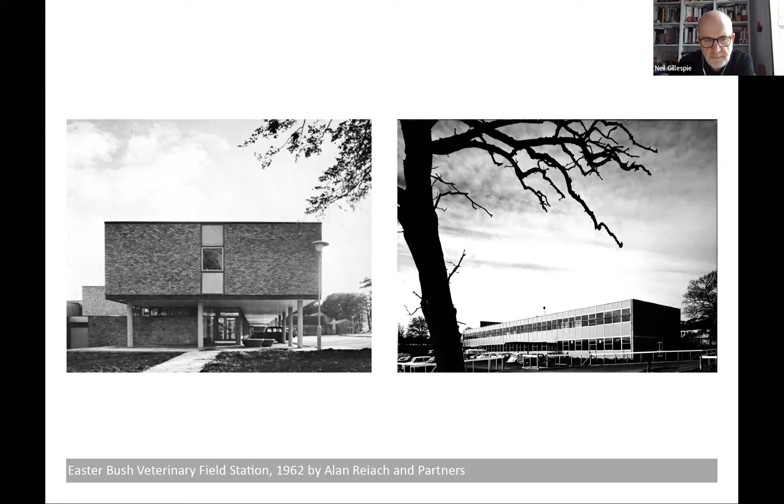And I think that modernism, if we go to the next slide, Mark, continues to the present day. We see it as a continuity. We think there's still tremendous mileage in that particular kind of modernism, albeit along the way we've added more elements or more layers to that.

Our Maggie's, for example, introduced perforation, the introduction of the light catcher, we called it, in the courtyard. You'll see references to that within Forth Valley. So we're talking about an architecture that is based on our own heritage and our own history, and that connection back to a 1960s modernism, particularly Scandinavian. Next one, Mark.

And we're also fascinated and inspired by the Scottish landscape, and particularly Forth Valley College and the River Forth, and that floodplain, and the three campuses that we were involved in, beginning with Alloa, then Stirling, and finally with Falkirk, the largest of the three.

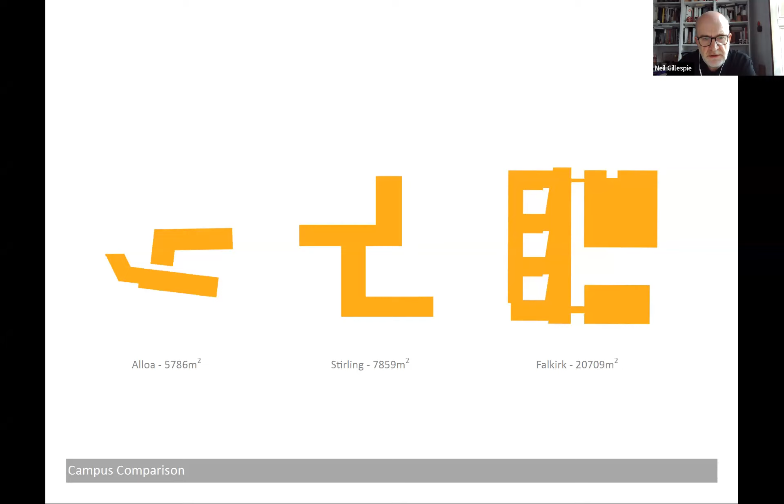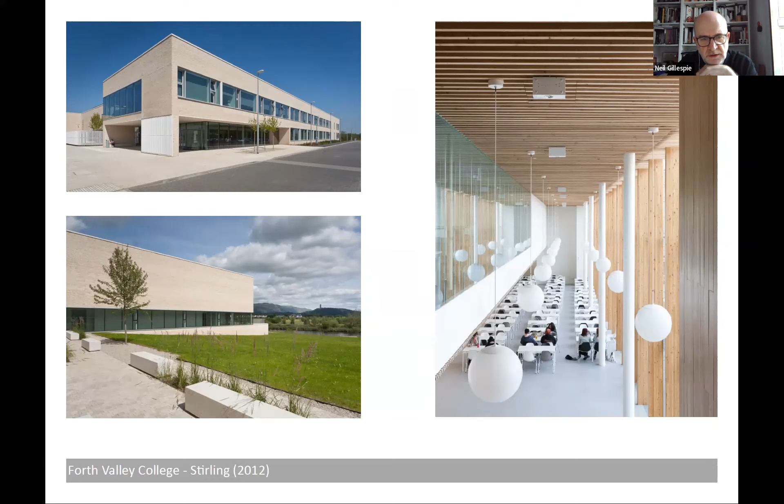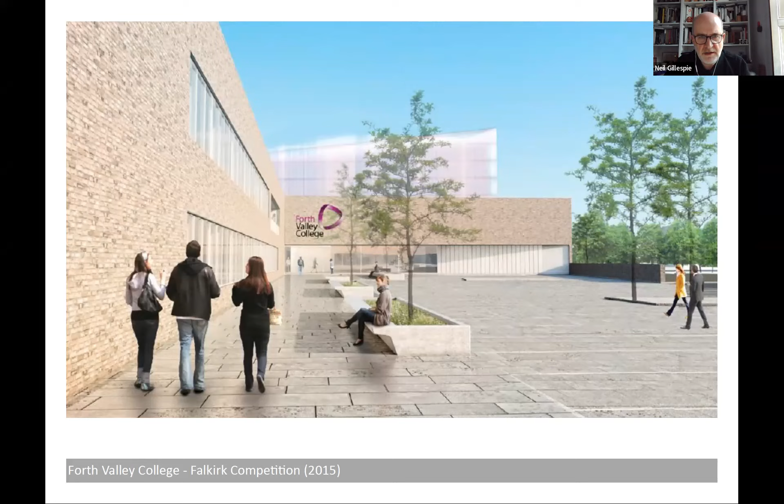Next slide, and we'll go through the diagrams quickly. There was a competition for this one, and the first scheme was a more ambitious scheme than the one we built. In actual fact it had a theatre in it, Falkirk Theatre, but probably correctly it was thought that project should remain within the centre of the town rather than out on the edge. But it did have a more exuberant, gestural aspect in that first iteration.

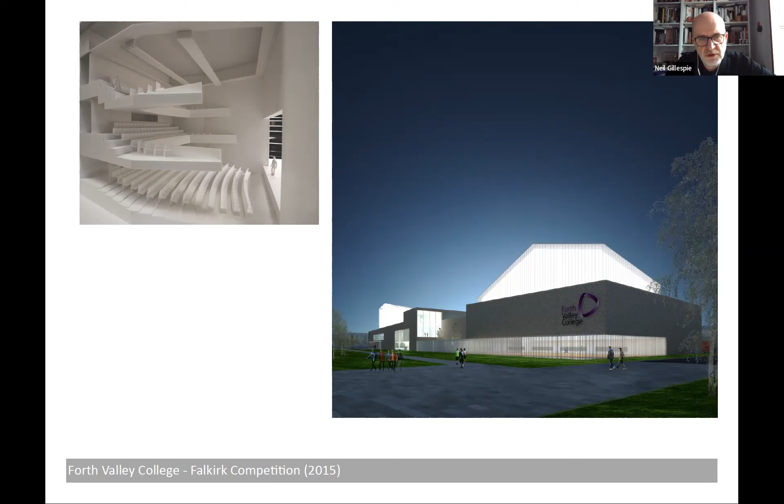From that there's a sense of a flat, open view through to the Kelpies and back to the town centre itself, this diagrammatic sense. The football stadium is immediately to the east of the site.

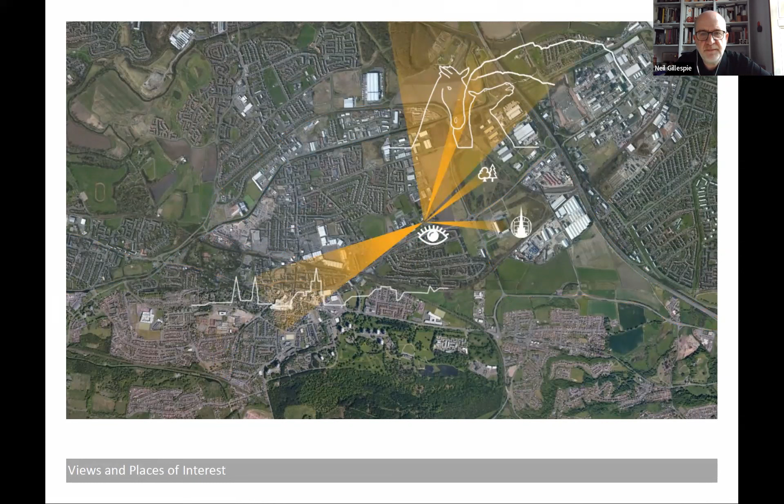And an industrial area, a lot of industrial, giving you a sense of scale. We're about 10 to 15 minutes from the centre of Falkirk to the south and west.

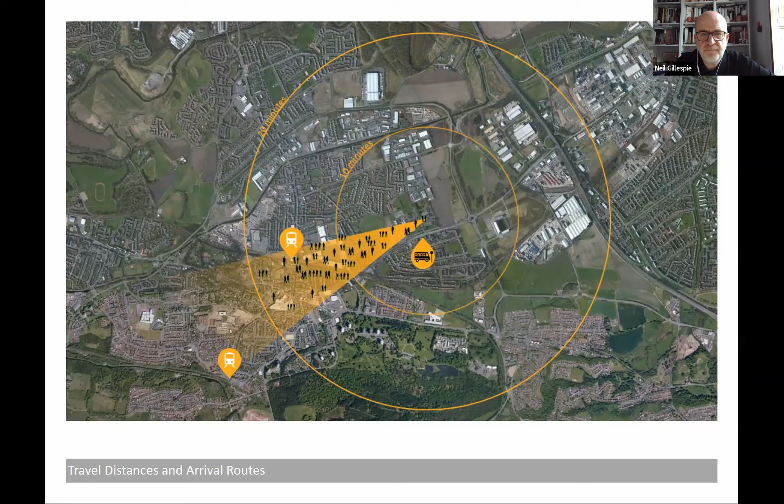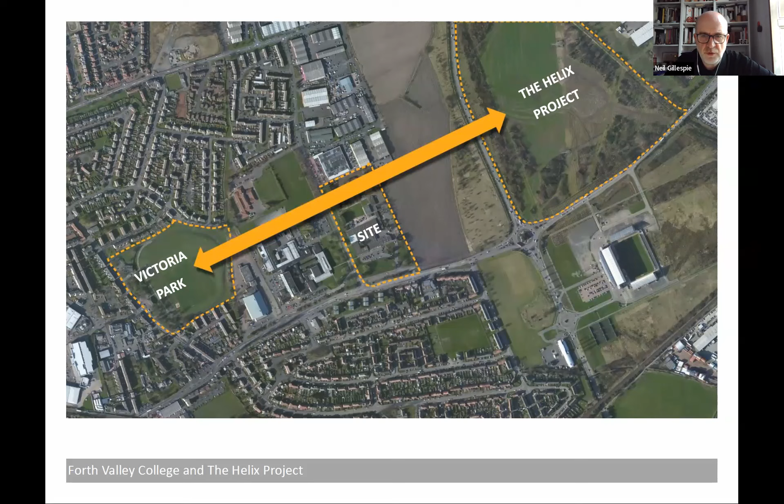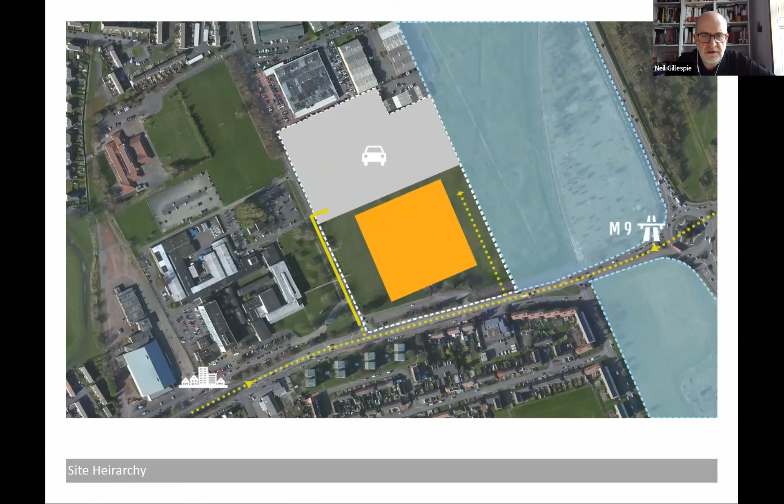You can see the football stadium, and the site is split very simply, bringing the yellow part, which is the site, forward to address the M9, with parking to the north.

We split it very simply: number 2 is the staff and student parking, which begins a route through the building from the north. Visitors parking is number 1 and enters from the south.

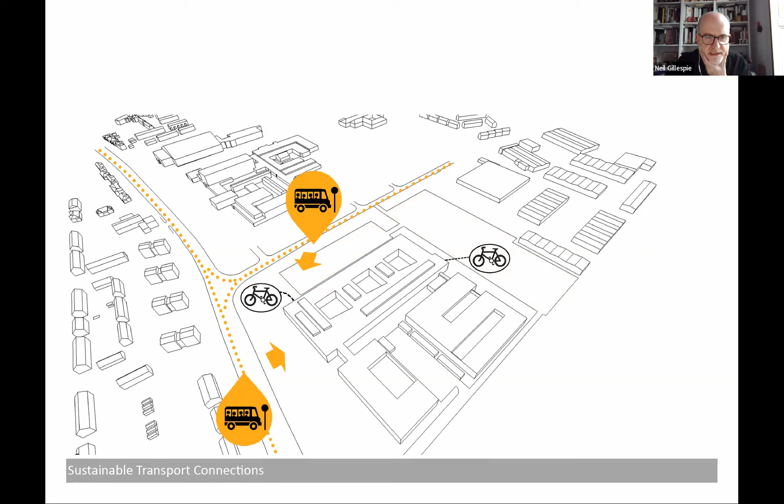Along with where the visitors parking is, bicycle parking and public transport are brought onto the site.

The building itself - Mark will explain this in more detail - has three basic components. The grey is a workshop building. The brownie colour is the sports and community spaces. The multicolour building is what we used to call a linear matrix, a series of...

...legs around courtyards. You'll see this in our Stobhill Hospital and our Inverness Justice Centre - the sense of bringing daylight and amenity to the centre of the building through a series of courtyards.

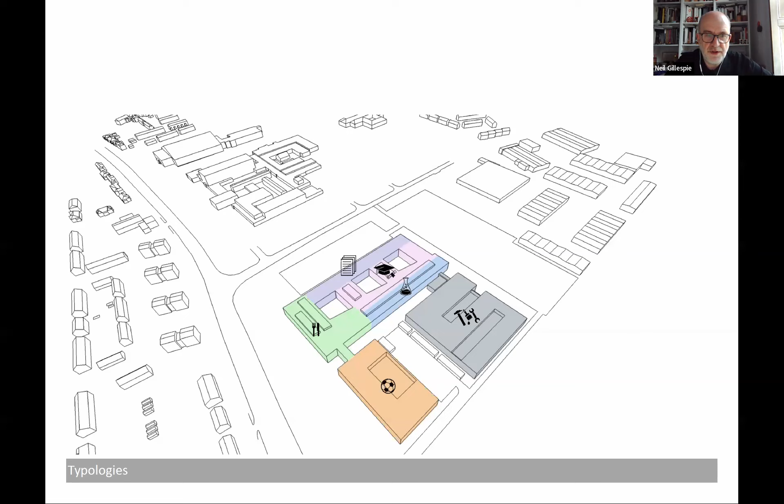The green represents the dining areas and flexible spaces. What this means is that the building, as it addresses the town, also allows the community to access the building out of hours.

That coloured area involves all the shared and flexible spaces which relate to the town, while the college specialist spaces run to the north towards the staff and student entrance.

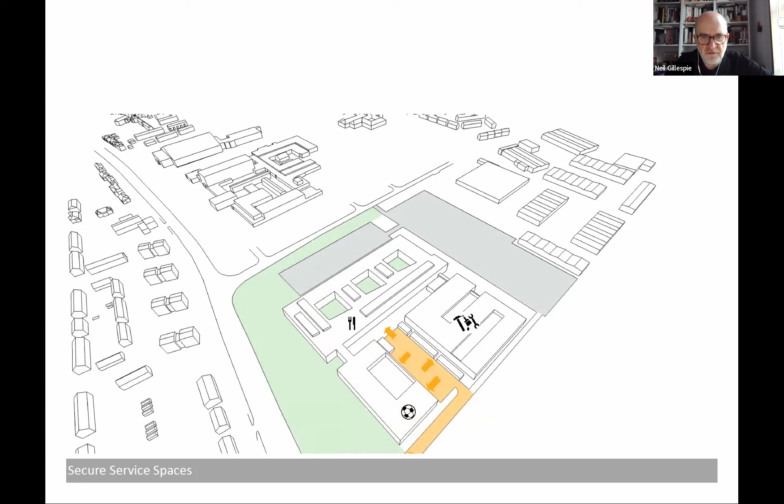The service yard sits between the three of them, giving access to all three. It's a separate, secure access from the M9.

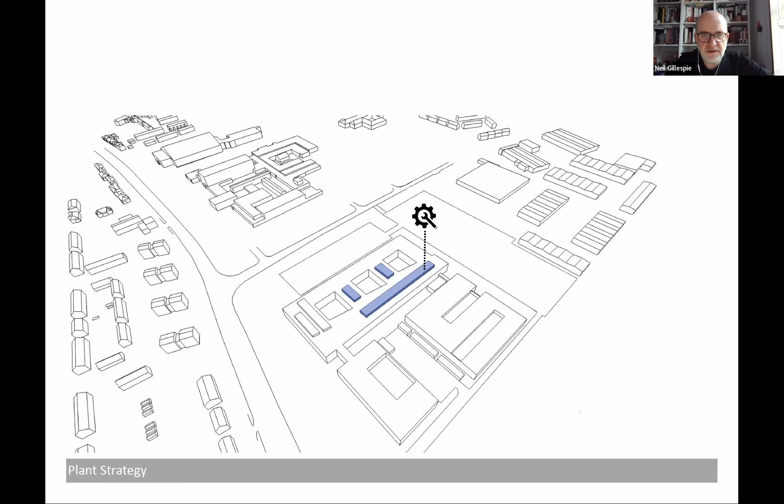Plant strategy on the roof, which Mark will touch on later. This Victoria Park connection, through Helix to Victoria Park via the college, was a really critical move through the site.

Together with a really subtle colour palette that the landscape brings. The landscape colour calls out the Forth Valley logo, but it's the silvery colour which works incredibly well with that Danish brick and the birch trees, as they grow up. We start to get a real sense of that Scandinavian idyll that Alan Reiach was interested in, and we still are.

Thanks, Neil. I'll have to go at a bit of a clip just to get through the next slides.

That's effectively just picking up on where Neil left off. The building finds its way to the southeast of the site and is pulled back from the public access routes to the south and west, creating dignified civic space in front of the building.

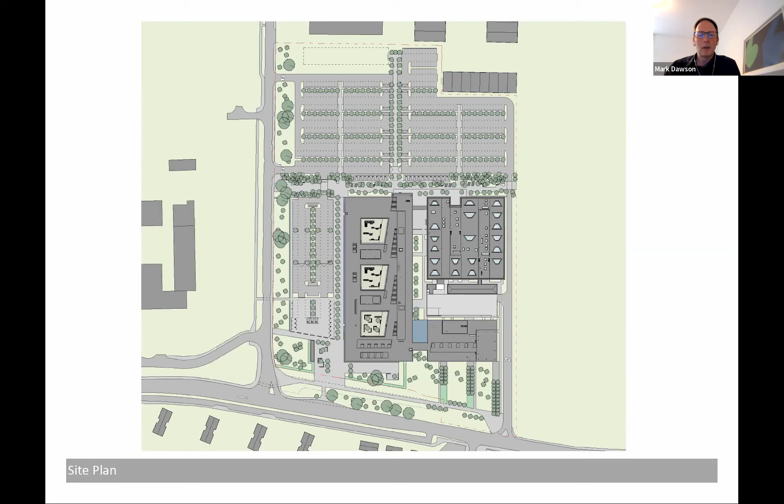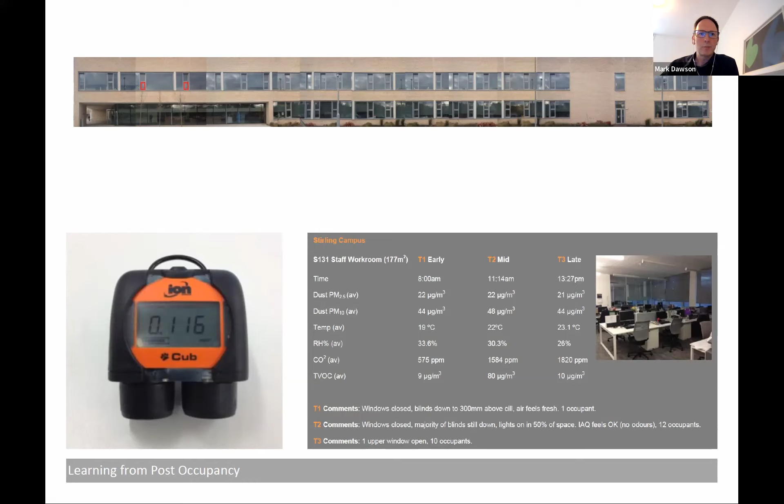We started the design of the Falkirk campus by looking back at the design of the Alloa and Stirling campuses and at the post-occupancy evaluation assessments done for both of those projects. One interesting finding was that some of the highly occupied south-facing areas tended to overheat and have poor indoor air quality at times. So that was one of the things we tried to address with the design of the new campus.

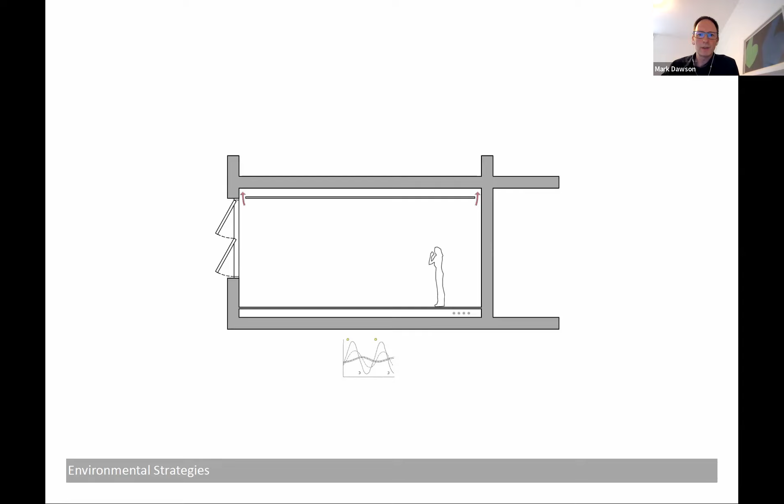In Alloa and Stirling, we had a suspended ceiling wall to wall, but in Falkirk we tried to get access to the potential cooling capacity of the precast concrete floor slab to help iron out the peaks and troughs we experienced in Alloa and Stirling.

Another thing we introduced was mechanical ventilation as a mixed mode system, so we could still maintain opening windows but have the boost of the mechanical system in the background on days when it was a bit still outside, helping draw air through the building and keep comfort conditions. In winter, you can close up and rely on the mechanical ventilation system with the benefit of heat recovery and the energy benefits that brings.

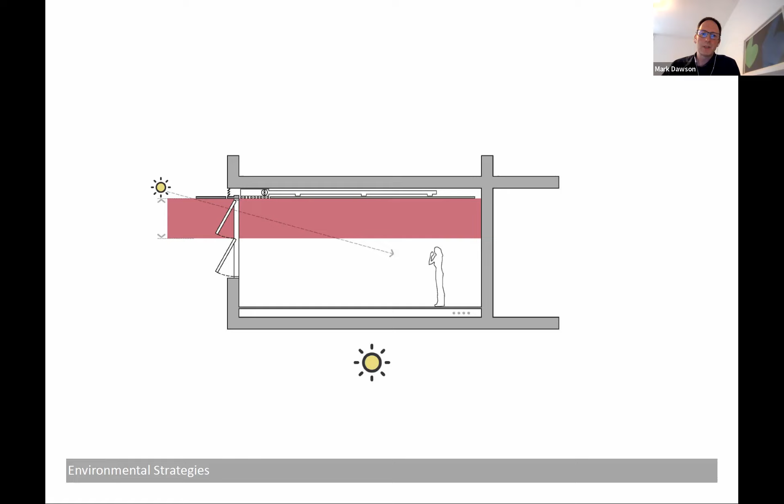In terms of daylight, we've got a generous floor-to-floor height of 4 meters, allowing ceilings about 3.2 meters high, which gives a really nice feeling within the space. Because we've placed the glazing right up at ceiling level, it allows deep daylight penetration into the back of the classroom spaces, which has let us have a 7.5 meter deep classroom space, which also works in terms of single-sided ventilation where spaces need to be naturally ventilated.

For the lower section of the glazing, we were keen to maintain connections from inside to outside, so we placed the horizontal transom at 2 meters so it wouldn't interrupt that connection between the building and its environment. At the lower level, we introduced an 800 mil high sill, because you don't get any benefit from glazing down to floor level in terms of daylight factors within the room.

This also allows increased flexibility for the college—they can fit out the internal classroom spaces with benching at the walls if they need to.

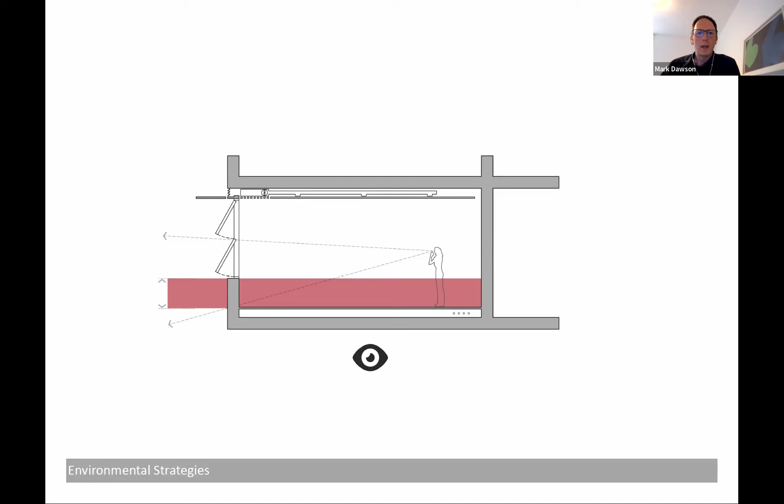A different approach on the south elevation, where we've got floor-to-ceiling glazing on the public-facing facades, helping create a connection to the public. We've got a 3.5 meter deep cantilevered precast concrete solar shading device, which lets us achieve full glazing without the downsides of unwanted solar gain.

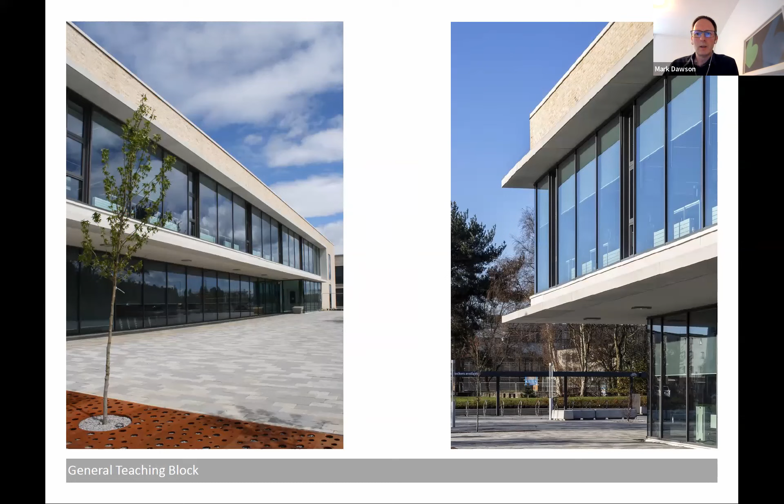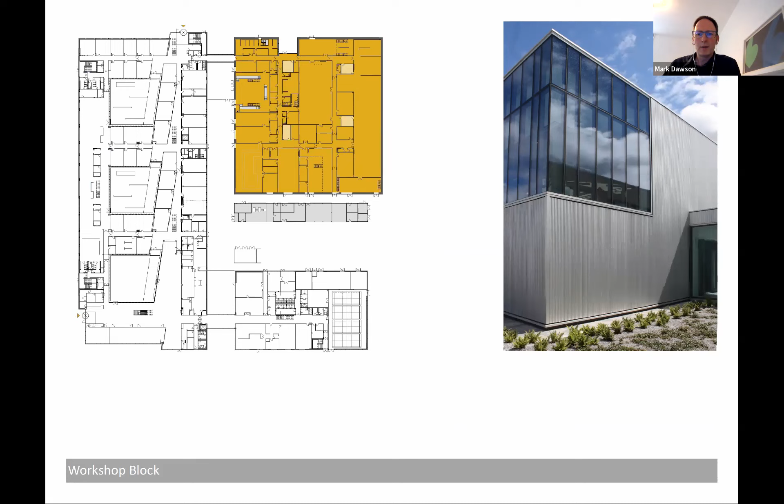The workshop block, in contrast to the materiality of the teaching block, uses an extruded anodized aluminium cladding system as a rain screen. On the north elevation, we've created that same 3.2 meter datum but flipped it, so windows only happen above that datum, allowing the college to fit out the workshop spaces flexibly, with light brought in from a series of roof lights and clerestory glazing.

What we really like is the contrast between the rougher textured teaching block and the smoother, shinier workshop block, and the texture that brings. It almost looks like staining, but that's just a visual effect of the aluminium cladding system, creating streaks that change depending on light conditions and viewing angle—we really like that almost drawing-like, watercolor type effect.

Inside the workshop blocks, we used roof lights again, applying lessons learned from Alloa and Stirling, where we used the structural bracing zone within the roof lights as triangulated bracing zones.

So the space between those bracing, we utilized that for dropping these really massive trapezoidal roof lights down and flooding those spaces with daylight.

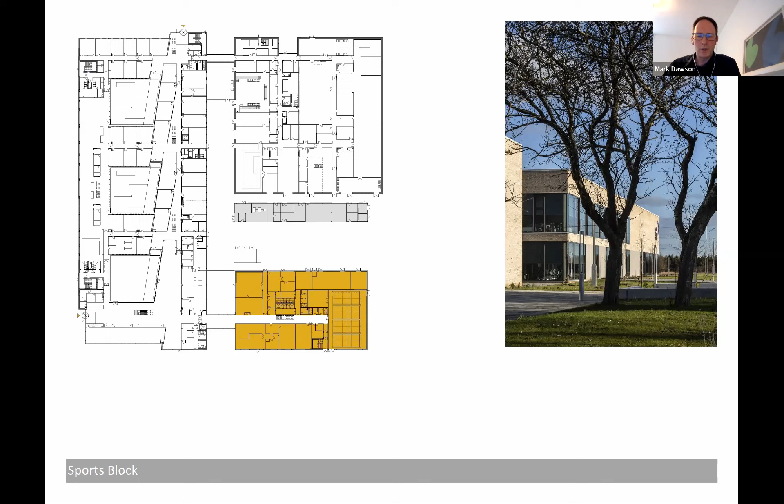Then the sports block to the southeast of the site occupies a really important, prominent part of the site. It's got the sports facilities, things like hair and beauty, but also social sciences as part of it. Obviously these are all community use facilities arranged along that south face, with some sporting spaces and teaching spaces associated with sport on the upper level connecting down into the spaces where sporting activities take place, having a nice connection between those two things.

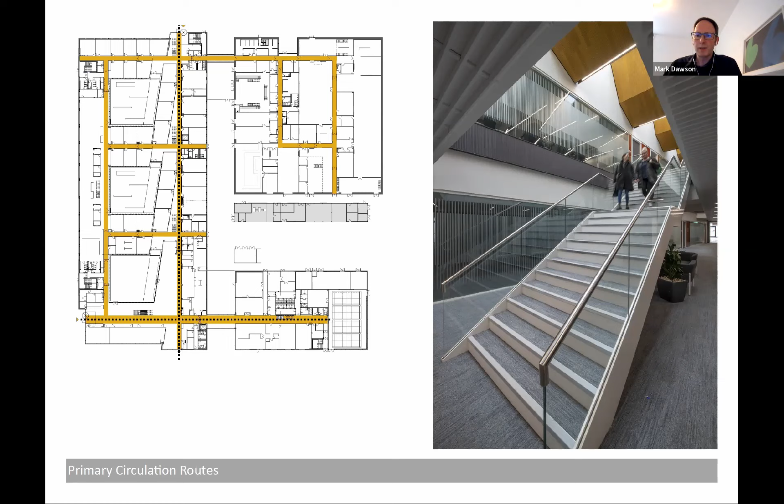For the circulation routes, we've played a game with the schedule of accommodation in terms of borrowing space from the staff areas, taking that circulation route out of the staff space, and planning it more efficiently. Then we transferred the area we saved into areas where the students could actually make use of the space, like the circulation space on the right that gives different learning opportunities, all punctuated with the roof light top-lit spaces.

The nodes of these circulation routes identify our orientation devices, really, where we've got things like stairs and toilets always placed in the same place to aid navigation and make the plan quite legible.

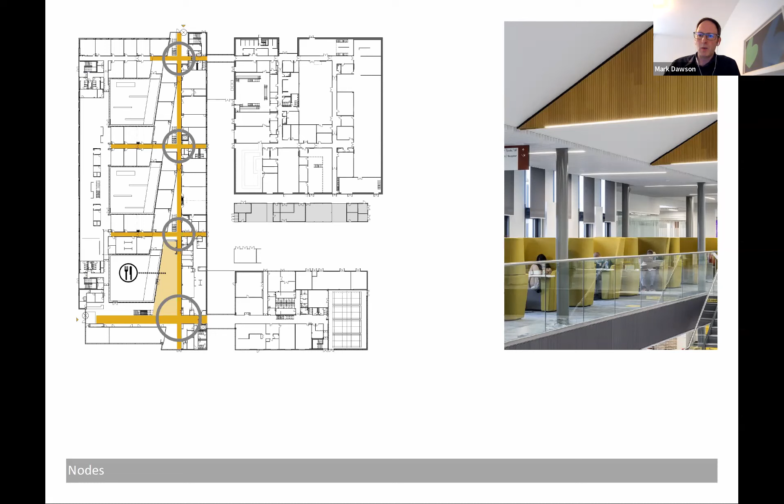Things like the refectory find themselves at the heart of those spaces. On the right-hand side there, one of the breakout flexible learning spaces that opens off that particular space gives you a small scale, individual learning opportunity. Then other spaces like the Learning Resource Centre on the right open up and give you the potential for group activity.

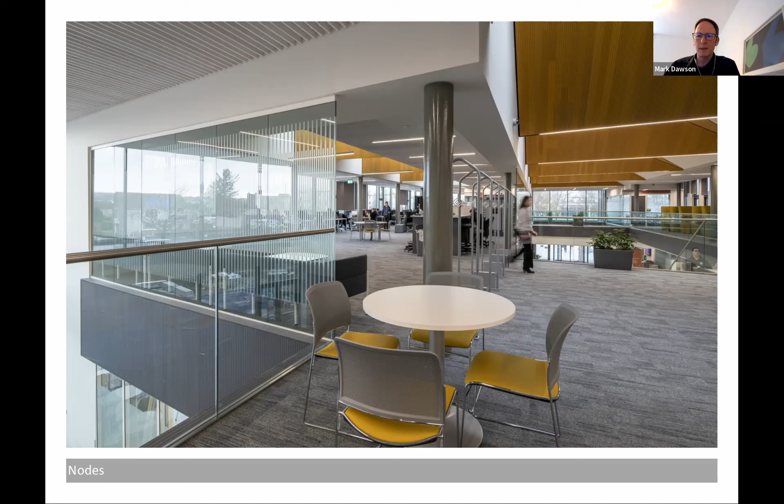The staff admin spaces are arranged over 2 levels and have a hole cut in the center to increase communication between the staff. The central space between that runs from north to south is arranged for the general teaching spaces - these are bookable spaces that aren't assigned to any particular department.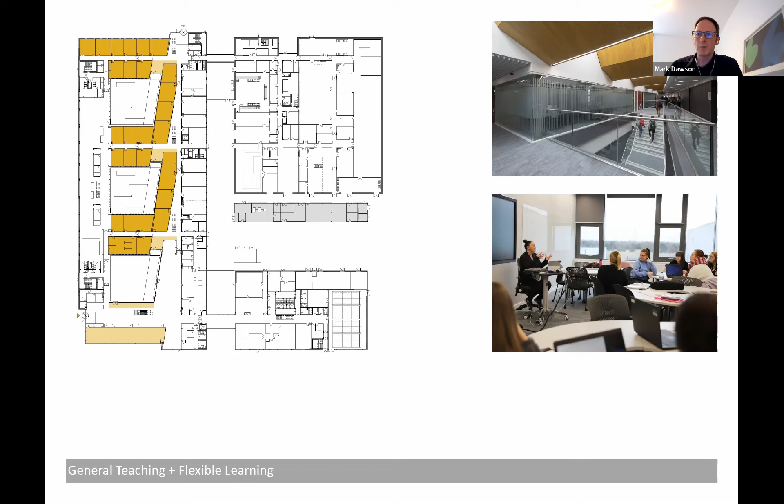Again, that twist of 9 degrees allowed us to open up the circulation and carve those holes into the floor plate, allowing generous amounts of top light down into the plan.

This is on the right hand side - this is artist Stephen Alders, who we've worked with on quite a few projects like the National Archive in Wick and Maggie's Centre. We really liked the fact that this painting is referencing a Rietveld interior.

We just really liked the colour contrasts on that, and that's reflected in the back-painted Valchromat, the back-painted glass, and the Valchromat linings to the roof lights that we've brought through into the college.

And then just making use of the circulation spaces - even these sort of little eddy spaces that just branch off the circulation, getting beneficial use through that.

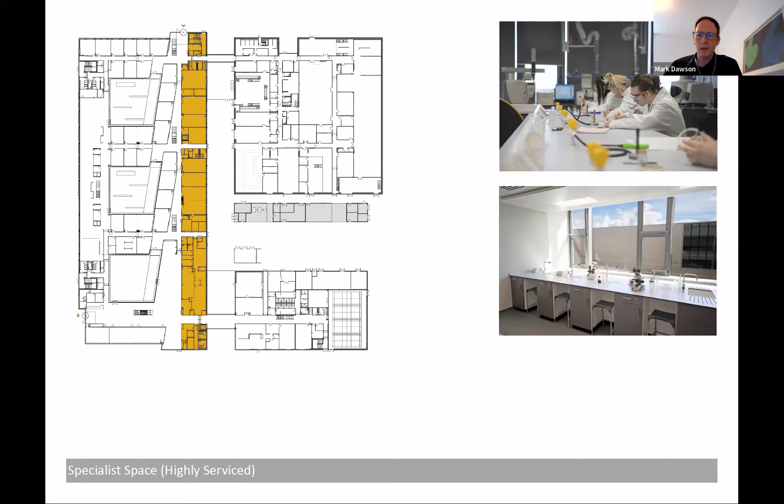The specialist, highly serviced spaces like the labs and the science spaces are in this north-south spine, which is arranged directly beneath the main service plant spaces at roof level, just to shorten duct runs and make everything as efficient as possible.

Bringing that through into the roof lights, we've really enjoyed playing with this roof light design. We've got it associated effectively with all the circulation routes and all the key spaces as a sort of motif that runs through the building.

And again, that line idea - the drawn lines and the Valchromat on the left - being reflected through into the lined perforation, or the pattern we've cast into the precast concrete on the outside, hopefully tying the inside and the outside together conceptually.

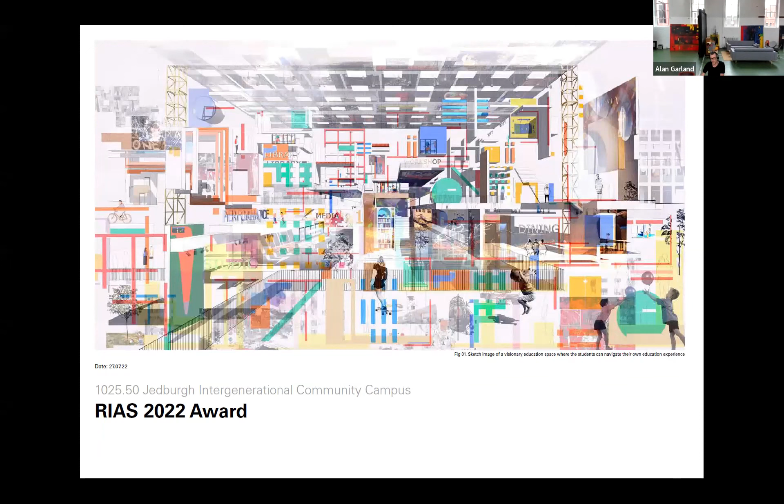One of the key ideas is nestling it into the landscape. It's the Scottish borders, a wonderful landscape of rolling hills, and we tried to make this large building part of that landscape, to ingrain it into the natural setting.

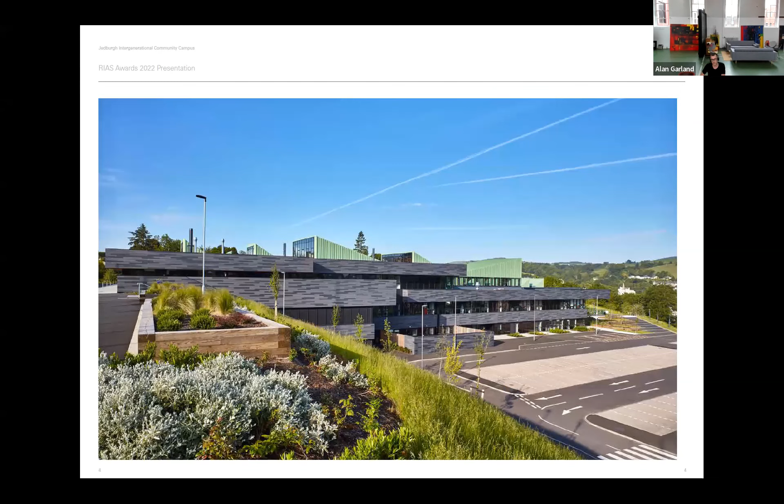That's the external main key shots that have been promoted. Internally, this is a key space, the information plaza. When you walk in, it's a space that the Scottish Borders Council or authority doesn't really have elsewhere. It's a communal, large volume space - not really a dining room like many schools have, but a more community focused space, which I'll pick up a little later.

That's looking in the other direction, where it has the classic stair upstairs like many schools, bringing you up into the space. It's a very community focused school, slightly different from many of the other community campuses that have been done. So we really tried to innovate within that space.

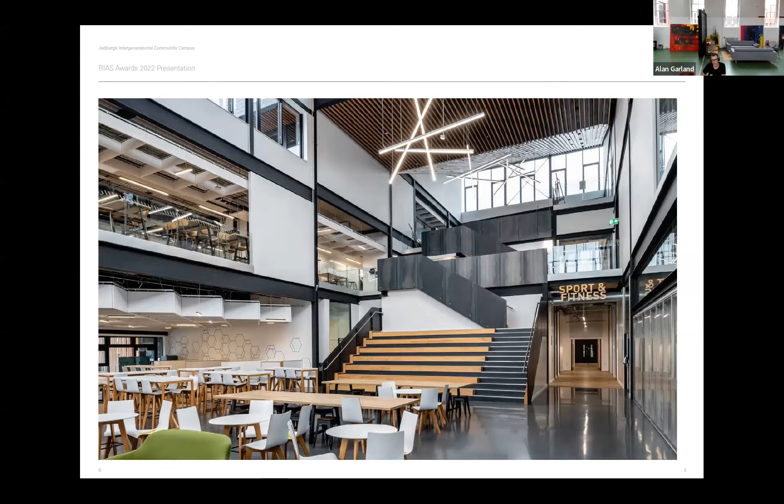This just looks into it - you can see on the right-hand side the main information plaza, and on the left some of the teaching spaces break out onto this open plan. There's this idea of the community accessing these facilities within the space, all being connected and visual throughout it.

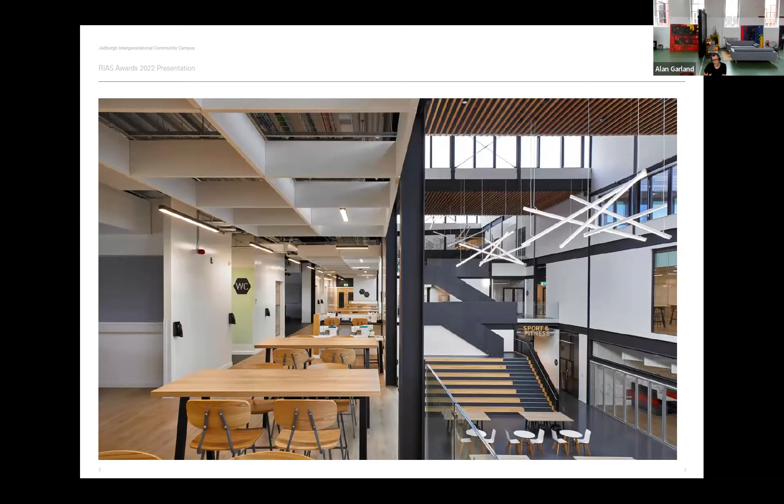This looks at some of the teaching spaces where we tried to make this an actual classroom, but break the mold from the traditional classroom. So this is somewhere for individual study, small group study, discussion, debate points, or even a space for each year group that's theirs to combine.

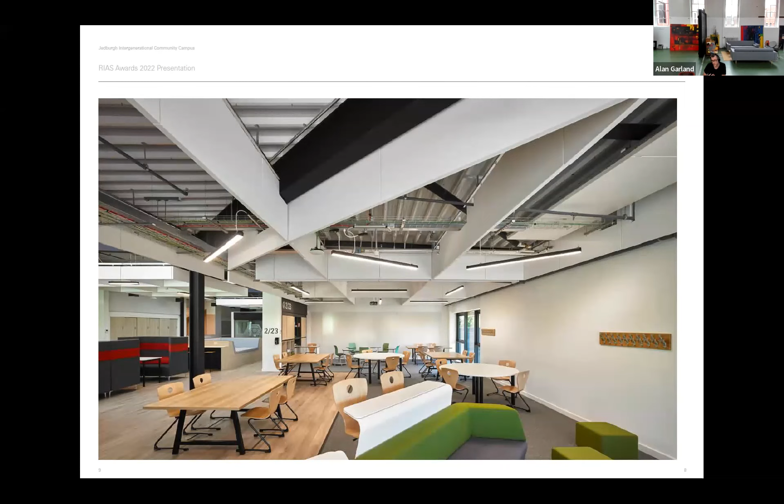One of the ethos as we go through this is about trying to change or review particularly the senior phase of education. This is again a paired classroom space, open onto the breakout, so we really tried to break down the model of enclosed spaces that we've seen in many schools.

This would be the science lab, which looks at a cluster arrangement rather than individual labs - it takes 3 labs and converts them into a super lab arrangement with demonstration benches and different types of furniture, trying to make it a standing workshop type environment rather than sit and chat. The STEM lab again brings in different technology and a combination of different education modes.

For us, this project allowed us to look at 3 key aspects of the architecture practice that I think the practice are very interested in: place - what makes a building, how do we ingrain the place - and community.

Part of the work with this client, the Scottish Borders Council, is about flipping the dynamic of their estate. One of the sayings was, this isn't a school that the community gets access to - this is a community building that the school uses. So the idea is that this is a community focused space, and that's part of that intergenerational campus.

That leads onto the next one, the learner journey. The school, or this space, this building, was supposed to be for lifelong learning - 2 to 102 was the sort of description. This is what it's tended to be used for.

In the centre place, Scottish Borders, Jedburgh is located down just north of the Southern Uplands. It's a rich landscape of rolling hills and historic, almost ancient towns nestled in there, with some real grand structures that cross through the valleys, and a beautiful rolling landscape. The history of Jedburgh was founded around the 9th century.

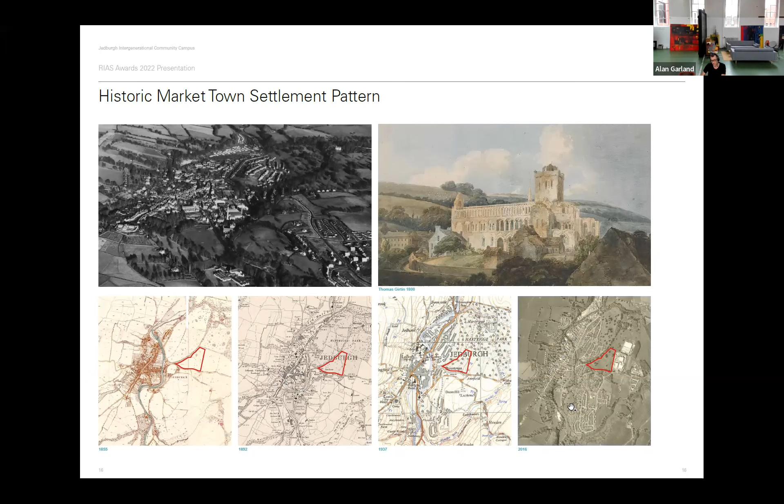We look back to what was there to understand where it's going to go. That's the site here, and you can see through the older maps how it's a market town. As it expands across the water, it moves more into the new developments over the last 50, 60 years of post-war housing expansion.

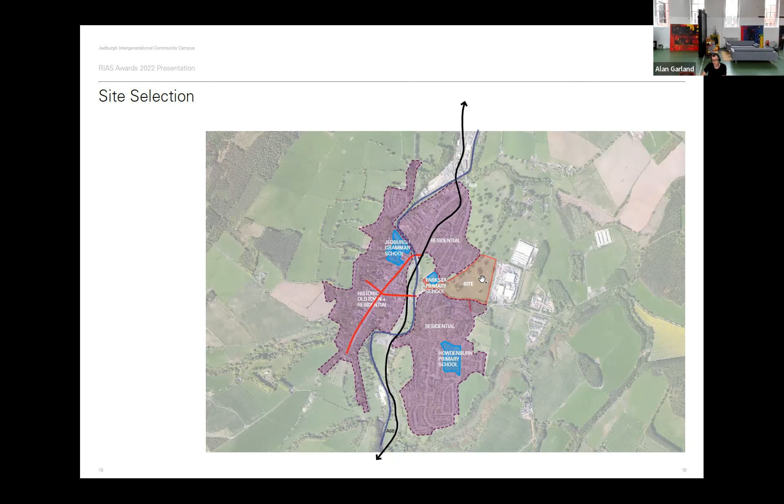So they decided to build on what is a very challenging infrastructure site. You can see here, it's a greenfield site, not developed within any of the records. It's the right size, but that 40 metre change from right down here to the top of the hill where the factories are was a significant challenge with no road access.

A dirt old path along there, a historical driveway with 150-year-old trees that go along it - we had to navigate through that for a road. But as you can see, it's a beautiful landscape setting. The views you get along there and over the hills were stunning. It was one of those dream sites you get given.

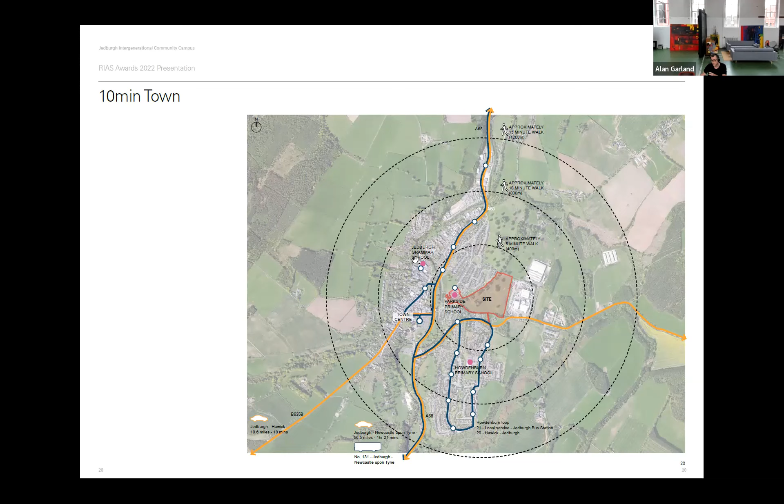You can see within the town, it's a 10-minute town. Everything's within that walking distance. It's all very compact, and the population is roughly about 3,500 people. The two primary schools, one over here and one down here, and the high school there, is all very compact in that town. So that was part of the ethos, to keep that delivery within the central space.

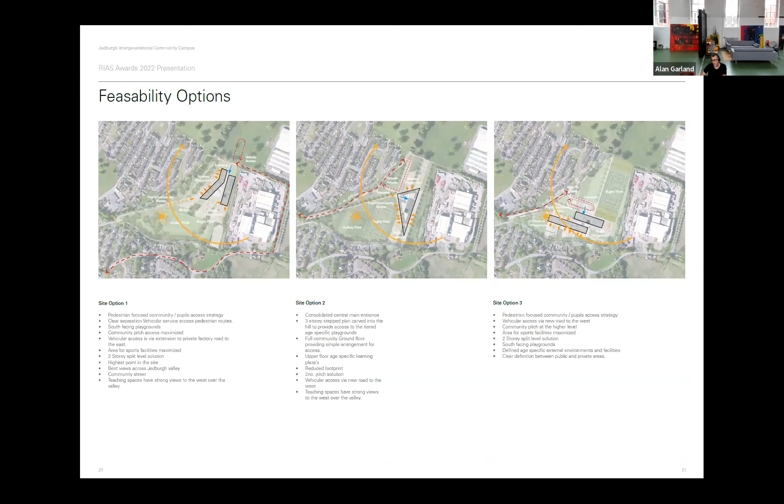And we tested some really early feasibility options, because obviously the infrastructure and how that's going to work within there was something we had to test through various options.

So the learning environment. When the client came to us with the idea, let's do an intergenerational 3 to 18 campus, we're like, what's the brief? Their first point was, let's put the scheduled accommodations, the ACRs, all the requirements we've done for the previous PFI and previous SFT funded schools, let's put that to the side. Let's start from scratch and think about what we're trying to deliver here in terms of education.

And they wrote a paper, the bidding paper. I'm not going to read through all the lines, but essentially they wrote this as the brief of what you want to deliver, and said go and come back to us with what you want to do. There's a space where the talents, abilities and skills of everyone in the community are brought together for the benefit of all. A space where education is for everyone at every stage of their life. The Scottish Borders works to enhance the quality of life, make best use of public resources, and ensure continuous improvement of services. The council aims to strengthen Jedburgh as a learning town where children and people of all ages can grow and learn together, where education is embedded within the character and quality of the place.

So that's essentially all they gave us, to say go and look at what this can be. We started to work up diagrams and ideas of what it can be, and it fell into sort of three circles, three spheres.

You had education, which was a vehicle for delivery of this. You have the community aspect - they wanted the facility to be open like a community centre or sports centre, so you could walk in at any point in the day, and the spaces for the school could be used by the community. Then they looked at enterprise - how could we facilitate the growth of smaller businesses, bring training opportunities for young people, and facilitate enterprise. If someone's working in a small business from home, they can come here and use this as small enterprise space. So trying to really flip what this asset can do for a community and make it key to it.

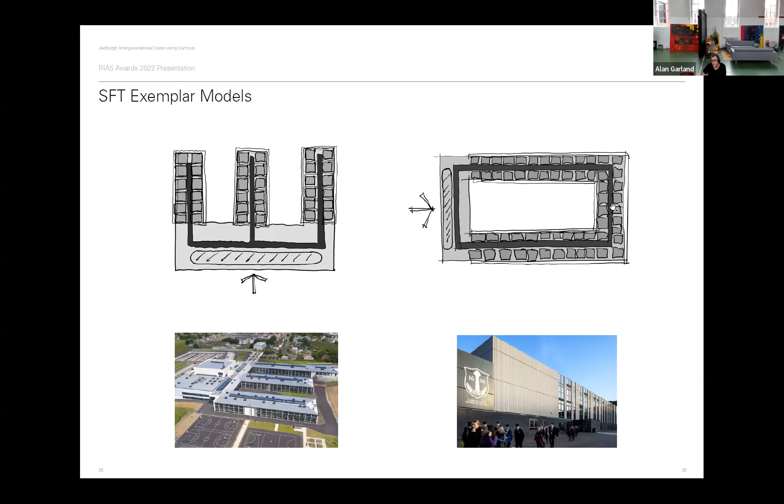The SFT promotes certain examples of the classic finger plan, which has kind of a PFI feel to it, and then you've got the super block arrangement.

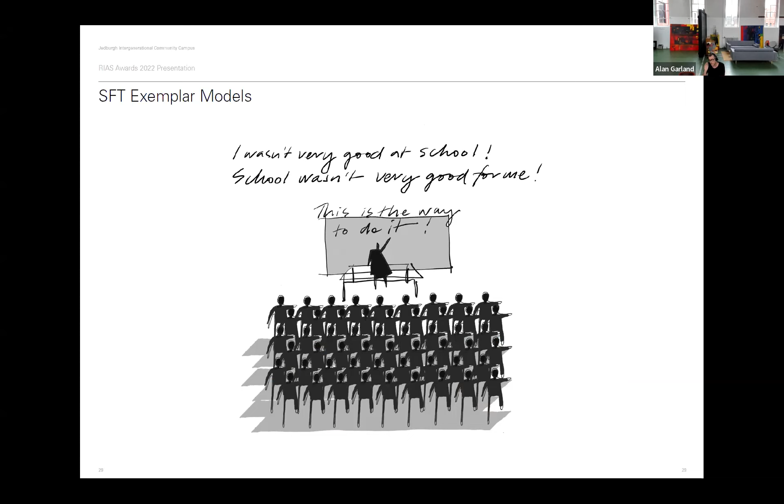From our analysis, and also discussion with the client, when you look at the early years and the primary, they've moved on in terms of the curriculum, but by the senior phase, there's still a propensity to do classroom after classroom, chalk and talk, 30 kids facing a board. That cellularizes the space and creates a warehouse of just putting kids in this space for a period of time, creating departmental boxes.

So we didn't want to do that. We wanted a space which engages with pupils, which brings life, and where people want to be.

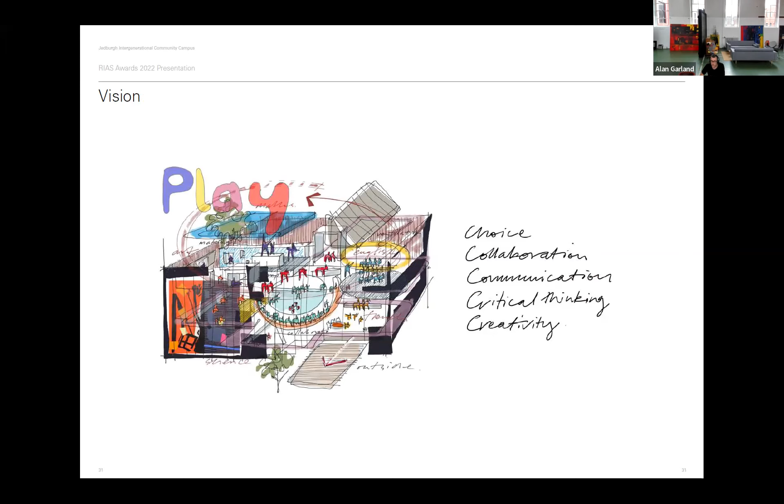It's part of that community space where it encourages pupils to engage in their own learning. Then we think about what do you need to learn? School and education, that's the vehicle, the key component of it. It's a broad spectrum, not just what results you get at the end. To make the holistic, rounded pupil, the super pupil, you need to bring that whole aspect to it.

We're trying, and it's not as much anymore about chalk and talk, it's about trying to create critical thinkers, looking at different pedagogies and how you can educate more than just that one mono pedagogy, which is primarily associated with 30 tables and chairs, focusing at the board, the sort of cells and bells.

From most people's journey through school, there is this sort of pre-primary, you know, you may have done something, and then it's all the primaries all the way up, and then it's secondary all the way up, and it's each box, you jump in each of the silos.

But the Curriculum for Excellence, we actually read it and went through it and started that idea of this is where you build a brief from. You look through the Curriculum for Excellence, and they've built this learner journey through the stages, where you group the stages together to minimise the transitions.

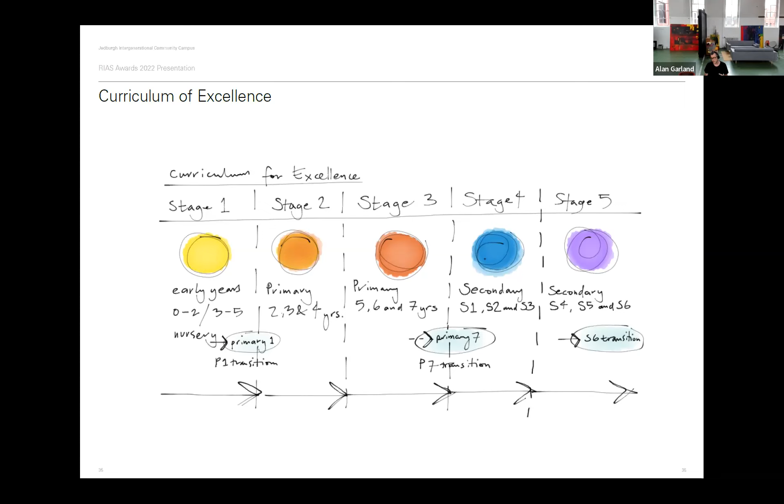As a 3 to 18 campus within a closed community almost, a sort of static population, that seemed like a very clear way of starting to build up this idealised curriculum of excellence layout, where you take the learner journeys. If you go through the process, understanding that a nursery pupil or early years pupil is completely different from where they learn in senior phase, you think of how you create the houses of the different stages through the journey, and then bring the things that can be shared across it, creating the sort of shared social space in between.

Then looking at that as part of that learning landscape, creating the whole landscape that ties it all together as part of that inside-outside arrangement.

Organisation in terms of, you find this very siloed approach, particularly to the senior phase, is an interesting aspect we like to challenge. Usually you've got your departments - art, math, all your different subjects - but the cross collaboration between them doesn't happen because they're so siloed. So there was an idea that instead of having it as departments, you take what you can out of that and create it more as a non-departmental model.

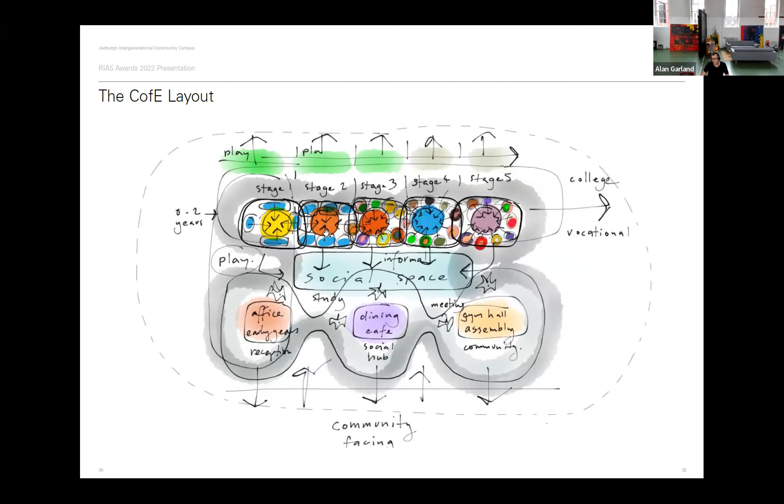So it's an age model, more akin to each of the learner stages. You've got maths taught within the stage cluster rather than in a specific department.

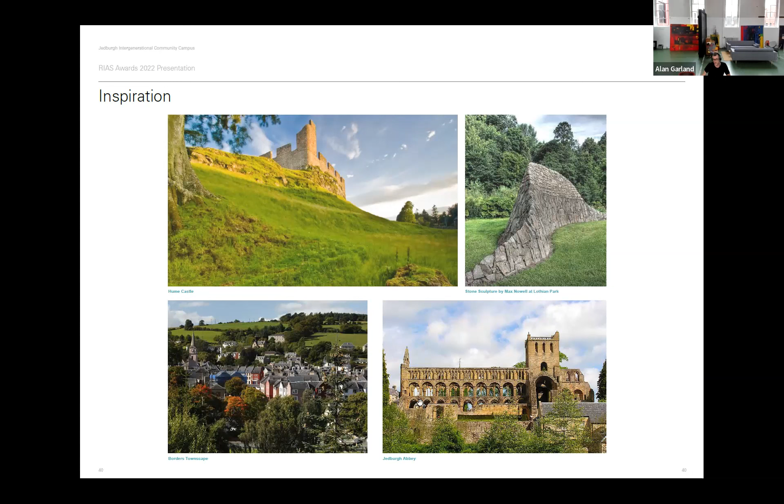Then when we flip back to the townscape, the Scottish Borders has this rich tapestry of space, of ruins - Hume Castle, which is stunning, sits on the hilltop. Then you have various different aspects, particularly in Jedburgh, you have the ruinous abbey that sits there, and you have these towns nestled within it. We're really trying to pick up those themes within the design.

When you look at the 20-metre change in level up the hill, how do we blend in that journey with that area, that space? The idea of layers and platforms and tectonics started to influence how we thought about the design of the school.

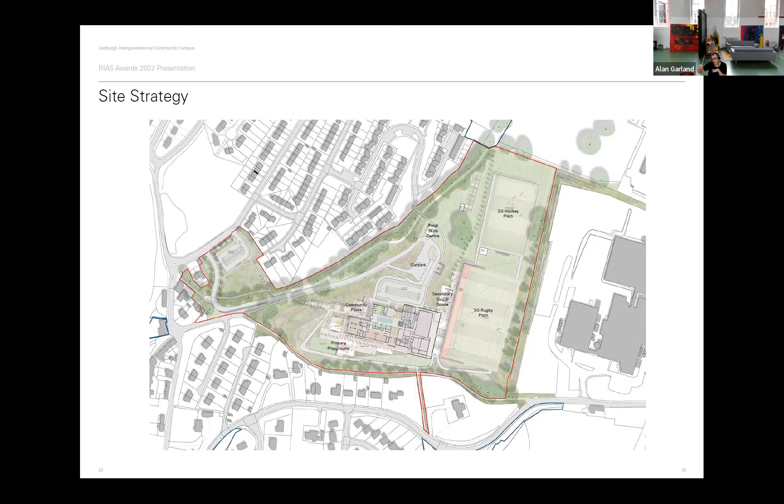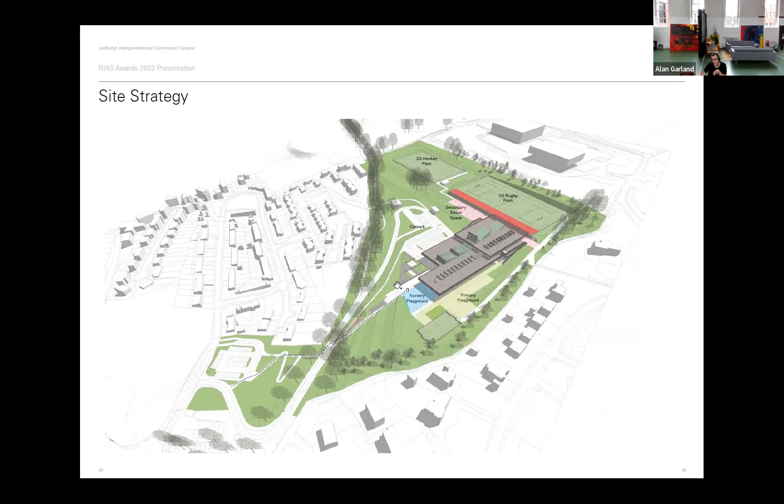So essentially cutting platforms into the hillside to fit this within it. This gives you a three-dimensional aspect of it. So we have that journey up from the main body of the town through there, and then you have the various different playgrounds again, and then the learning plaza within that space, and the big section cutting right through. The idea being that the landscape transitioned as we went through it.

Coming through the sort of historic driveway and that more wilder, larger bushed landscape spaces as you journey up, and then it gets more refined and more manicured to a certain degree around where we're at the school.

And then you have one large retaining wall with the building sat in there, so you nestle it in the hillside with the pitches dropped in the top of it. So the idea of knitting it into that site section.

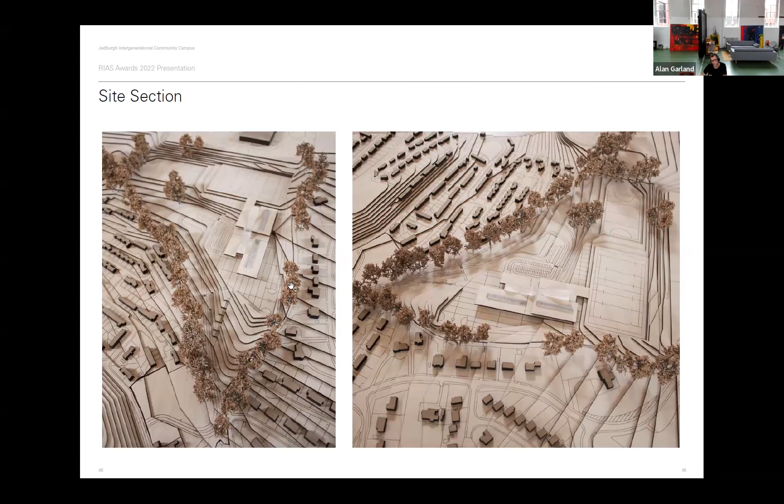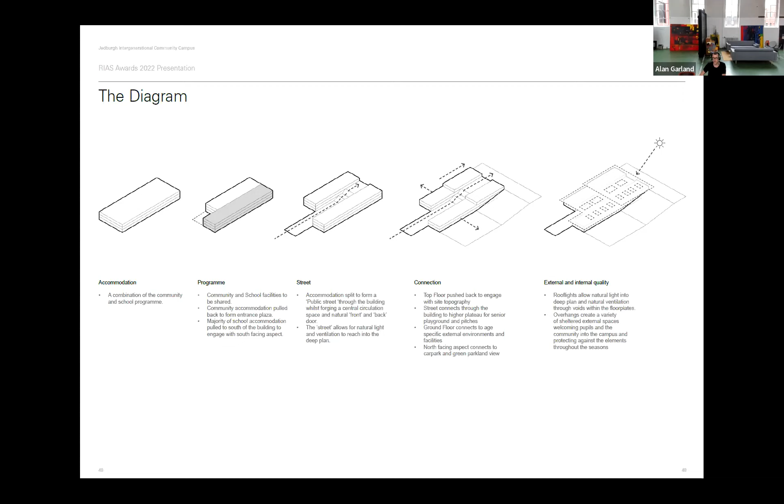And then there's extensive environmental modelling on this, looking at the aspect and the daylighting. It's a deep plan building, so we needed to ensure the daylighting is driven into the heart of that space, and also ensure the thermal gains and solar gains within there are minimised, given we have quite large aspects of glazing. And this is the axonometric, giving you an idea.

It's almost like the joke was, it's like the sausage machine, in that you bring in the early years at the front, and as you move through each of the different learner zones, they transition to come up to the final one, which is the most senior phase at the top.

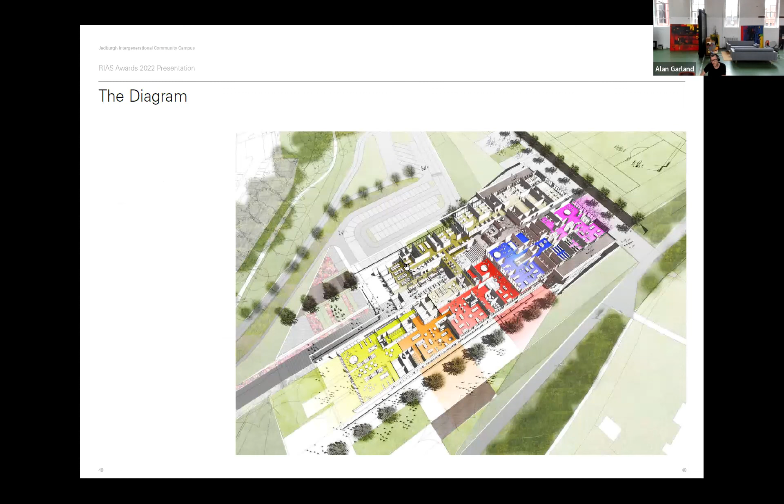And then through the middle you have this information plaza, as we described it. And then you have the most shared spaces. So within there are agile workspaces - out of class time, we made more of an agile space within there. And then you've got some of the dining facilities, but keeping that off this information plaza, off this central space, so it can be used for something slightly different, more as a community street.

We've got enhanced provision as well within there, and nestling the main halls in the back. That's where the retaining wall is, within the hillside almost, with the facilities and changing rooms within it.

So then on the main education side of it, you have the early years nursery, which then blends onto P1 and P2 with direct access to the external. And then as you go up the plan, you have the additional primary spaces, more upper primary, which then leads on to your S1, S2.

Part of the idea was that transition - one of the key benefits of the 3-18 model - is that the transition from primary school to secondary school doesn't exist. So it's seamless through the whole building.

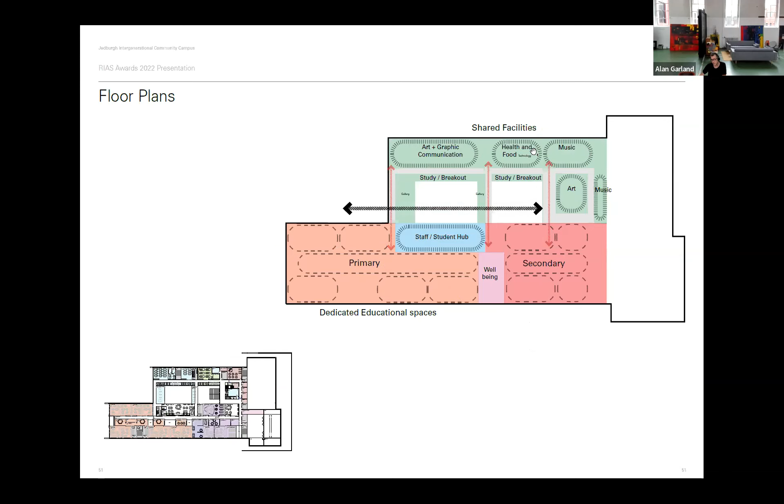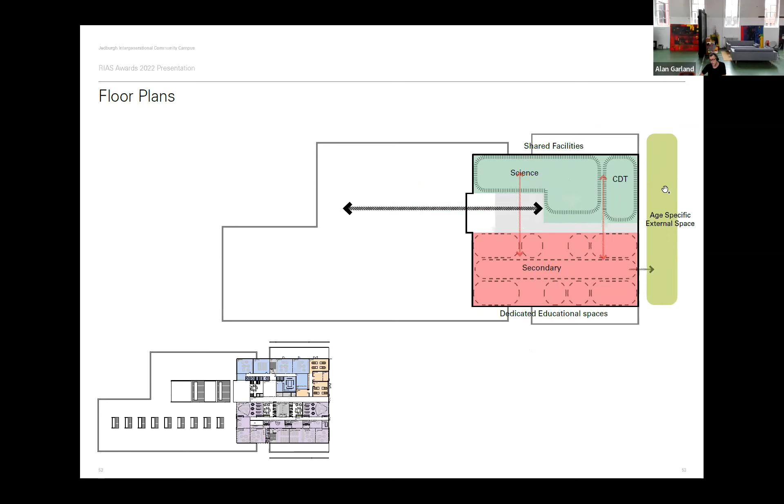And then with more of the art and other more shared facilities to the other side of the street, they'll be open to the community. And then as you go up to the next floor, you have the science, CDT, and the upper secondary school spaces in there. We have direct breakout into their external spaces up there, with that street connecting right through the middle of the plan.

Part of trying to be innovative is that over time we've worked in various different classroom typologies. We went from enclosed classrooms with the breakout outside—essentially a corridor that's slightly wider, giving an opportunity for different learning environments—to ones where we've taken away the doors and made a semi-enclosed teaching space that gives better access to the breakout.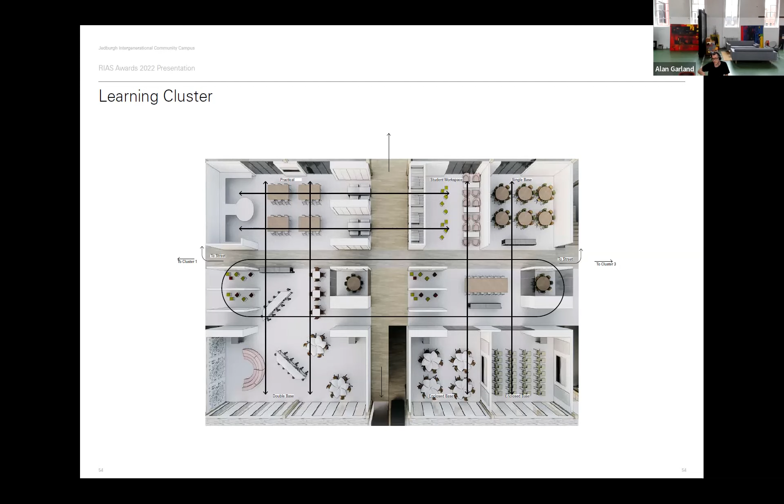Some of the practical spaces allow for lighter practical sides of science or food technology within this learning cluster, augmenting the briefed areas, and looking at a teaching space as a student workspace, or rebranding it. It's essentially a classroom, but you may go there to do something different than you would in the closed space—back to the idea of the pedagogy and teaching methodology, providing variety within the teaching base.

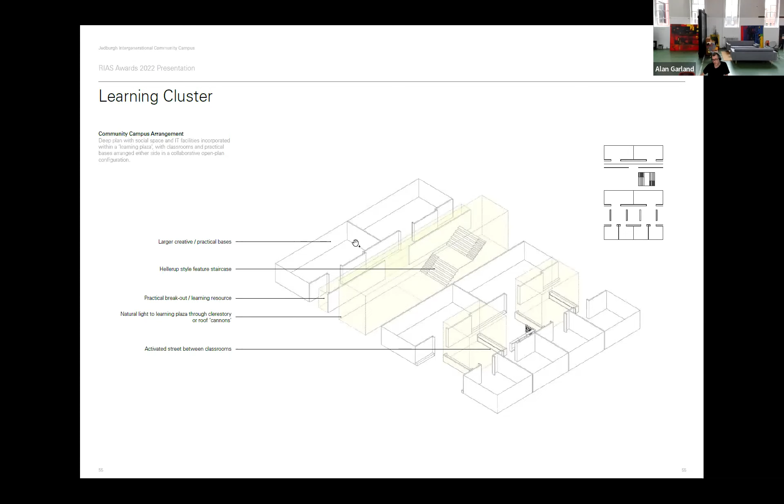This is an axonometric cutting through the building. We have some of the teaching clusters here with voids between them for natural light and ventilation into the heart of the plan, then more of these practical double classrooms along here overlooking the central atrium and the hall upstairs, and the public side with the practical spaces over there.

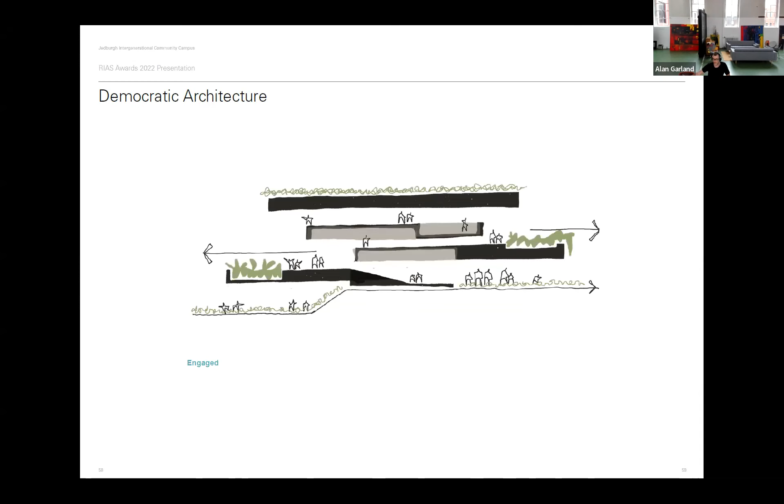In terms of the architecture, we were keen to bring in the idea of community and democratic architecture—not a block, but expand it out, reach out, and inhabit the building as much as we can, so you're inside before you get to the door. It's about taking away the idea of the confined, institutional school and making it a generous, reaching-out architectural experience.

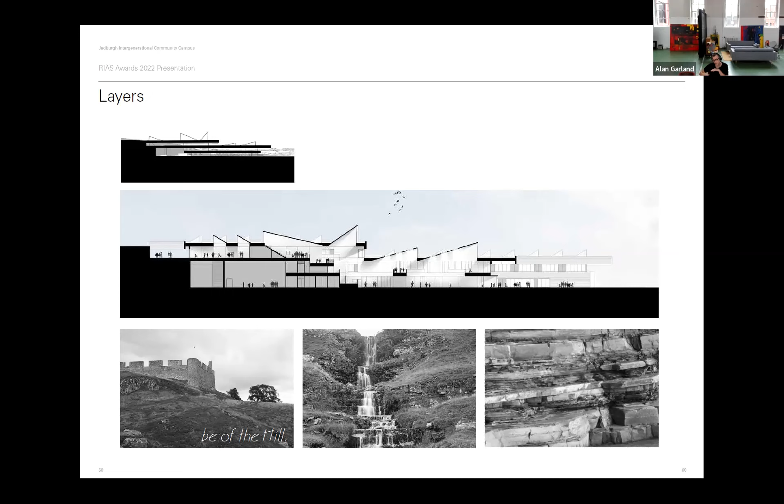That's actually a Frank Lloyd Wright quote—the idea of being part of the hill, part of that space, bringing the idea of tectonics and rock forms within the school. It's almost like the hill has been scraped back to expose these tectonic plates, which then becomes part of the architecture. This is one of the initial ideas of this reaching-out aspect of the school.

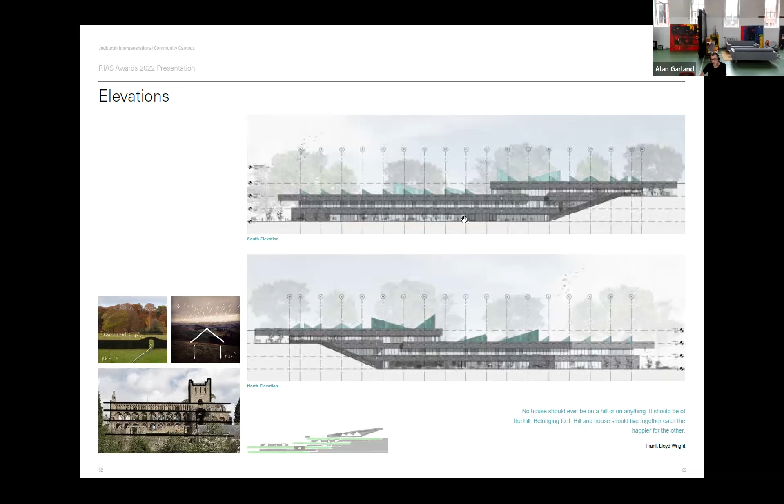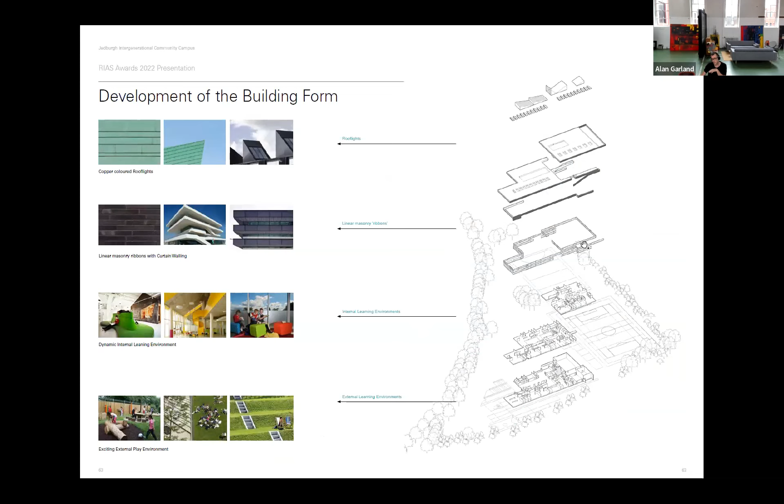Just the elevations—I wanted to make sure to include them, with the banding that runs across there, and some roof forms to accent the roof space. As I said, it's rain screen cladding and curtain walling banding around the base, then the roof has these roof cannons that draw light into the central atrium space. The breakdown would be copper-coloured roof lights, with a masonry banding as the initial idea, and ribbons of curtain walling wrapping around it, sitting within the tiering of the landscape.

Just a couple of statistics, since I've not focused particularly on the environmental aspect—there was quite a lot of work looking at how we drive performance. This was a Pathfinder project for SFT in terms of the energy strategy, part of which was driving down the U-values. We got the U-values down to the baseline passive house numbers for the walls, roofs and floors, but kept the windows to 1.2, with the air-tightness target remaining at around 5.

This was generally because the contractor was on new ground in terms of pushing it further, and there was an A-rated building with the EPC, with the SBEM calc coming out at about 77 kilowatt hours. The new target is 67, so it would be within band A in theory, but the SBEM calc isn't the best.

There's also a thank you at the end, and if you give me a sec, I was going to show this as well.

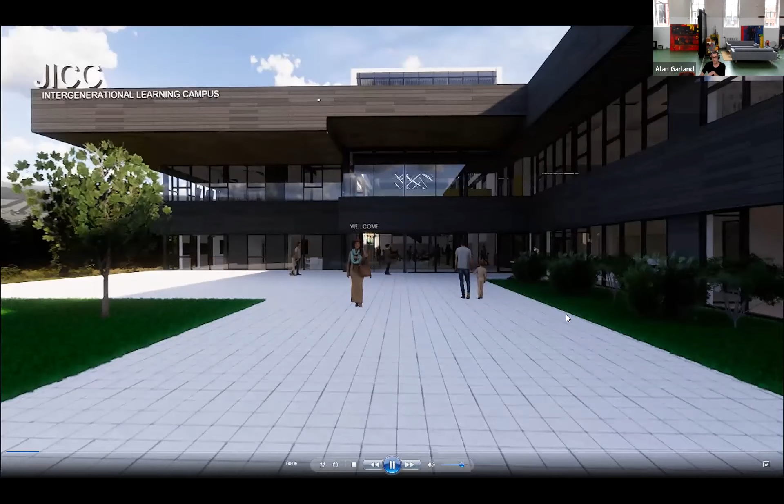So this here gives you a sort of flavour of it, an animation of the end of the job. This is quite close to the completed project, but it gives you a real flavour of the sense of this arrival, this idea of this community space that you don't buzz to get in.

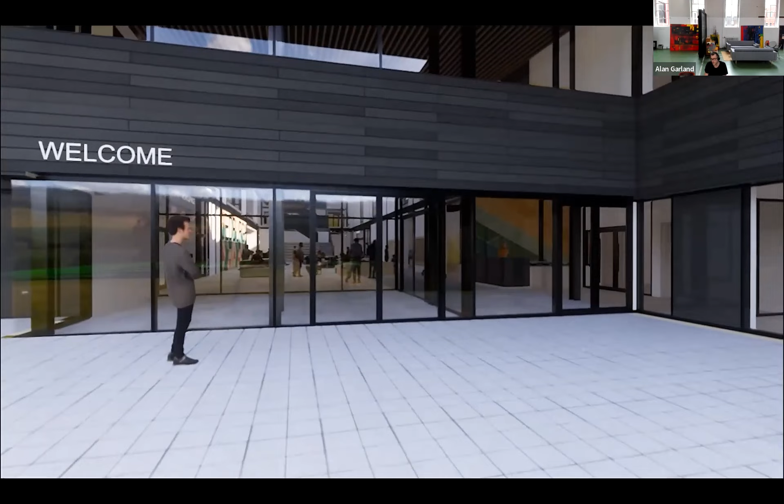You walk in this space, and the idea being that you would be maybe a parent, that idea of the outreach, that you come in, maybe drop your pupil at nursery, and then go do a yoga class in the games hall. So it's a community asset open to the public, as any community building would be. You have clear definition between public spaces and spaces you can't go, and clear control at the front door.

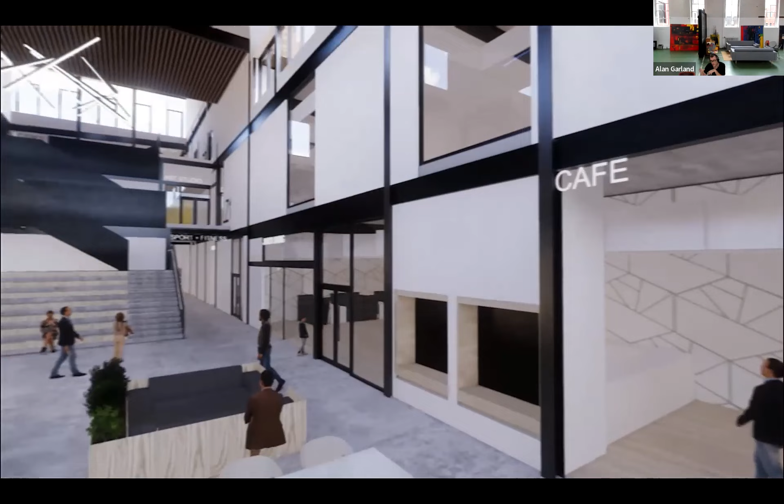But then the spaces off this central community plaza - there's the idea it was a street and there were shop fronts. The public library is moving here. There's a space for enterprise, so small businesses or artists using this space. There's a student cafe for the pupils to run, serving the public, with dining areas off there.

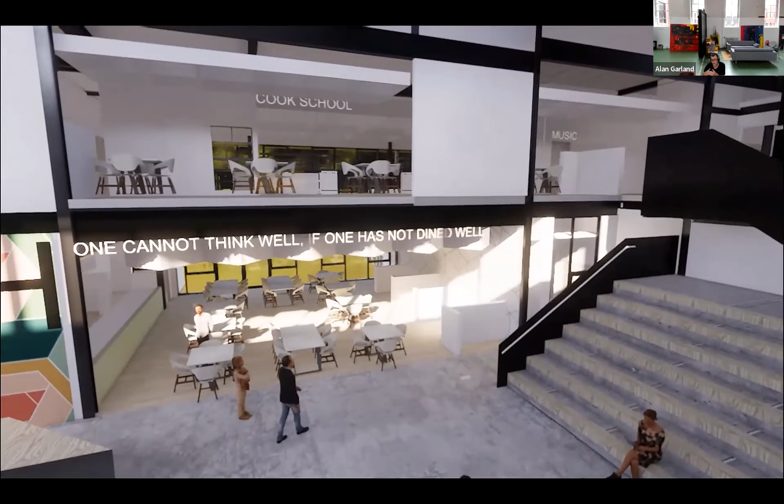So the idea is a member of the public can come in and get a school dinner. You can be an elderly person coming in - that's the idea of the intergenerational aspect. You come in and do a class, and you can also be part of this community at any point in the day. That's the idea we have.

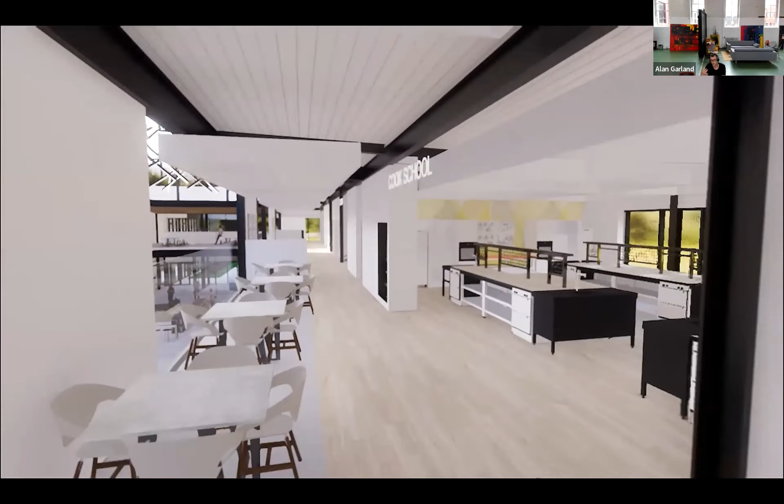You can see the music spaces and science spaces at the top, on the left hand side, the northern side of the plan, for that access element. So the community has the opportunity of using the CDT, the men's shed movement, or the music and recording studio, using what was a cook school, which we branded in here - a higher spec solution, more akin to the Great British Bake Off, which was the design concept of the client.

And then as we move through, we have the design studios for textiles, which are all open to this information plaza, with breakout in different areas. And then the last one is the art department, which has this great view - the best view in the building, overlooking the entire valley and the mature trees in the distance.

Internally, the aesthetic was all very much about exposing, being an honest building - exposing the steelwork and allowing everything to just about touch but not quite, trying to keep that separation of the structure, the walls, architecture, the lights, the balustrades, the finishes, just to create a slight separation between all the aspects within there, overlooking this central space within the plaza.

And I think that just ends right about there. And I think that's me. I'll probably hand back over to Christina.

Fantastic, thank you very much, Alan. That was really interesting - I was quite mesmerized by that visualization, having visited the building. There's actually an element of understanding and reality there. So I feel you gave us a whistle-stop tour.

So thank you to all of our speakers this evening. I think it's quite hard to present a building in 20, 25 minutes and actually get across what it takes to produce an educational building of this scale. Something that jumped out to me as a judge for the RIAS Awards is that a lot of it's to do with the client. One thing that jumped out from both projects is that the client seemed to have an attitude of either learning from what went before, as shown in Forth Valley College, or not always doing what was done before, in terms of Scottish Borders Council. So I'd like to ask both parties how much that really influenced your work, having a client that wanted to fight for the important elements of the design and not have every element value engineered out, and really felt you were on the same page.